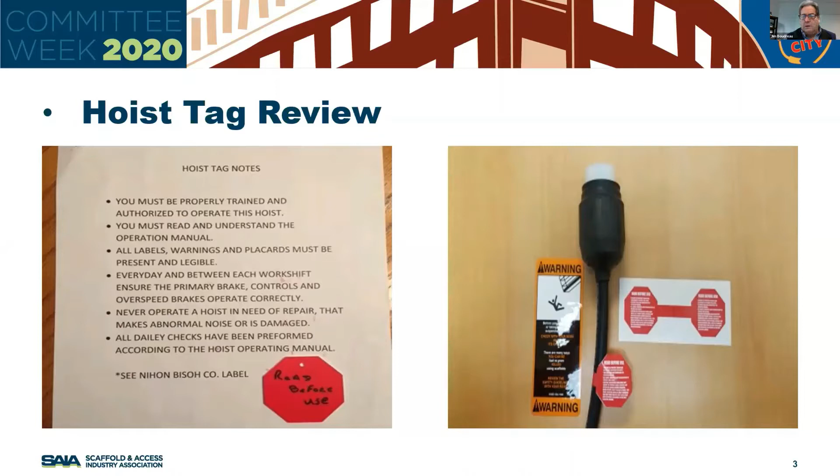Thank you. So ideally, the codes of safe practices for suspended scaffolds have been around as long as I can remember. The one we currently have is the longest and most comprehensive version, and we were wondering how many people really get to use it, and not only that, how many people can comprehend it. It's a concise document, everything you need to know about a swing stage in 3 pages, and essentially it's enough to put you to sleep. If you're competent you can maybe understand it. This idea was to try and put some pictures against it so that the end user who might not be able to comprehend the details of the codes for suspended adjustable scaffolds could go, and at least there'll be some pictures.

So that's the idea, no question on this slide.

And here we go, so these are the guidelines, I think, for suspended scaffolds. I think that's pretty straightforward to understand. I need to move you people out of the way. Okay, guidelines for the erection and dismantling of adjustable suspended scaffolds, but it's the codes. And here they are, just showing people what they are. I think this is the latest one up to date, and as I said, there's 3.5 pages if you haven't looked at them.

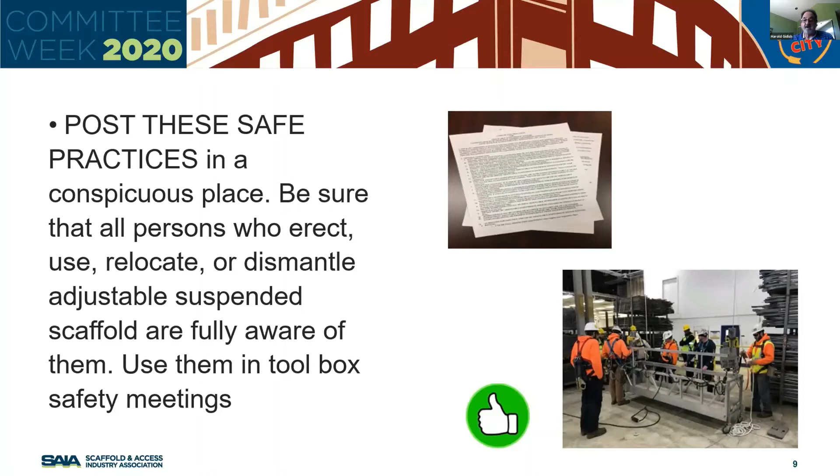There we go, so here's a picture, kind of depicts what people are doing regarding looking at the stage and getting ready to understand what it is they're looking at before they get to use it. Thumbs up sticker. Anybody got a better picture than that? I think it looks pretty good myself, but better pictures will be acceptable.

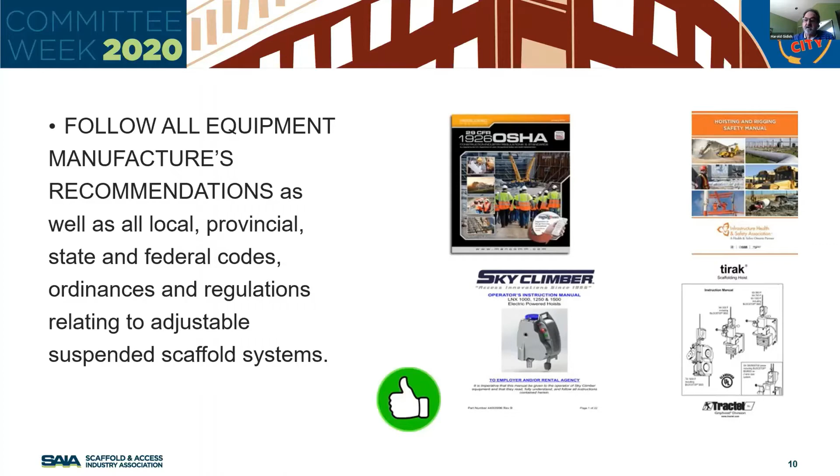The next slide, slide 10, if you're making any comments - it says follow all equipment manufacturers' recommendations as well as local, provincial, state, and federal codes, ordinances, and regulations relating to adjustable suspended scaffold systems. So got the OSHA sticker, got a manual sticker here, gives you the thumbs up. Anybody got comments, send those off to Jim. We've already got one comment, I've already noted it on the stickers. We'll respond to that at the end for the hoist tag sticker already.

All right, thank you. It says survey the site. A competent person shall survey the job site for hazards such as exposed electrical wires, obstructions, and unguarded roof edges or openings. Thumbs up picture. Everybody take a minute to maybe make some comments on this particular one.

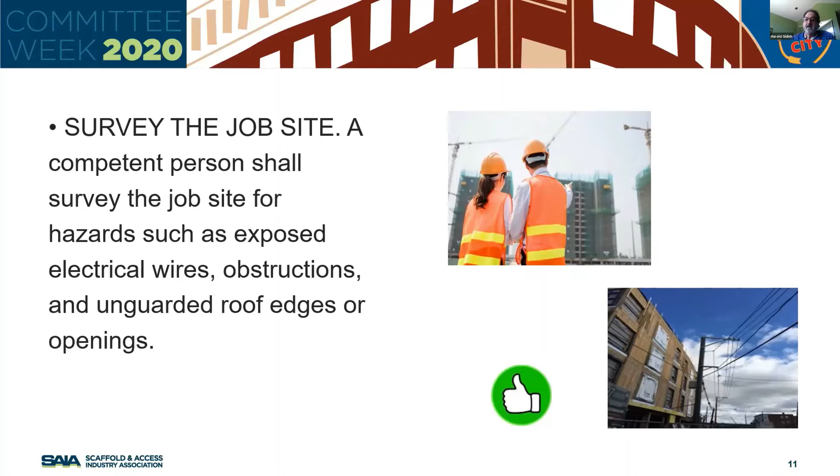All right, we'll get on to the next slide, 12. Inspect all equipment before each and every use. This is a close-up shot of a cracked weld. It says never use any equipment that is damaged or defective in any way. Mark it or tag it as damaged or defective and remove it from the job site. Got the thumbs down, don't do this practice.

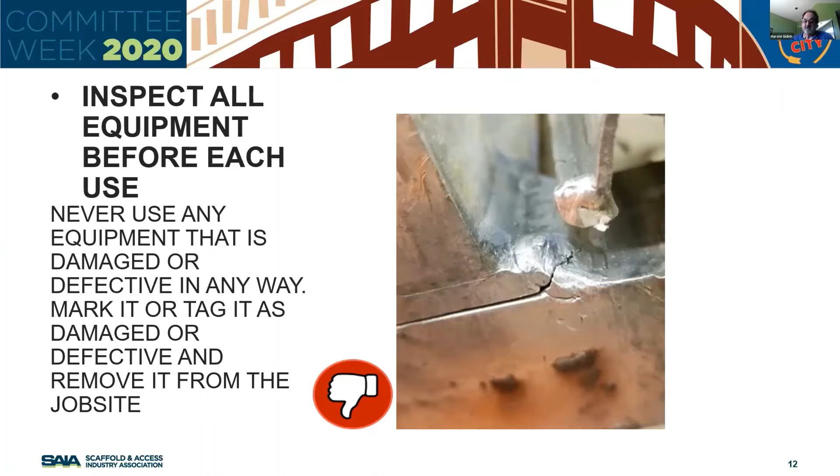We could also put the circle with the line through it showing don't do this, but does anybody have better pictures of that? It might take a minute to understand what that is, but it's definitely a cracked weld.

Next, this one is a copyrighted unit, so we do need a substitute. No, go back, Harold. Yeah, the cartoon one. Next one, that one? Slide 15, Harold. Oh, okay, right there. That's a copyrighted cartoon, so I do need one from someone. Anyone? And that one there in slide 17, I need to remove those pictures.

Okay, very good. So this is slide 15. It says, do not abuse or misuse, and it should say an adjustable suspended scaffold and adjustable suspended scaffold equipment. Never overload any equipment.

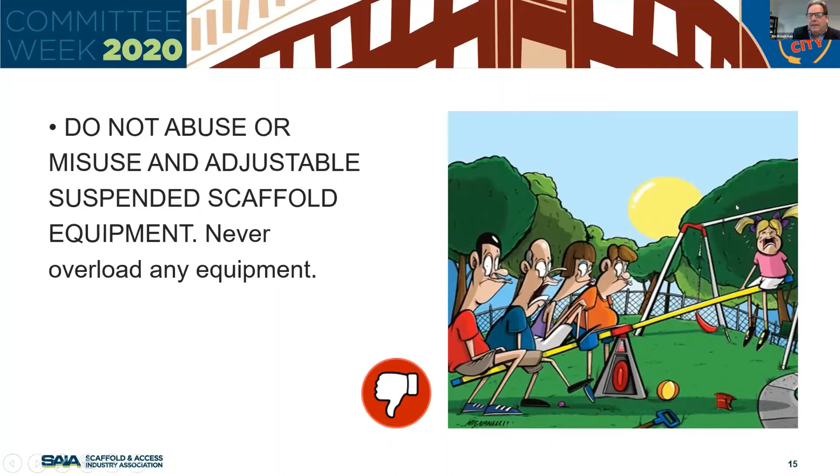Right, so we need to change that. It shows me, I thought it said a 4-to-1 safety factor. I like that, it did. So if we got one, there's a platform with a lot of steel on it or something like that. You guys see them, so if you can get them to us, that'd be great.

All right, the next slide says never take chances. This is slide 17. If in doubt regarding the safety or use of adjustable suspended scaffolds, consult a qualified person. Again, copyrighted, we need a new one.

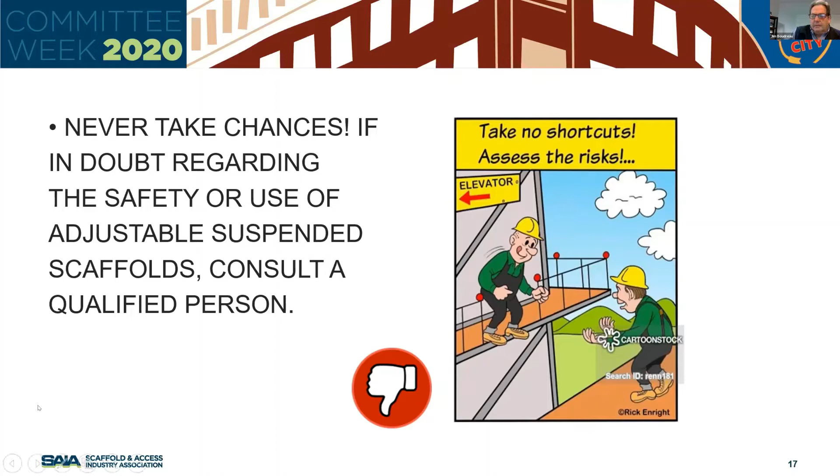And once again, anybody got a better picture? We'd like to get it. So that's slide 18 for comments.

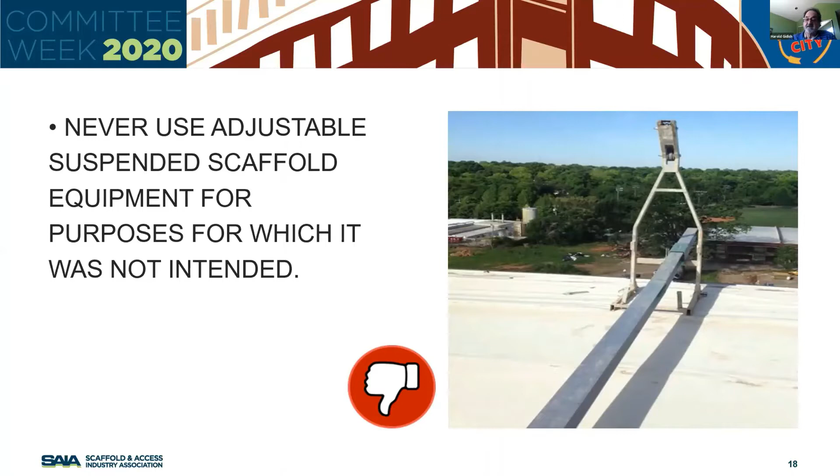Comments, that's slide 19. Not to be mixed up with COVID-19.

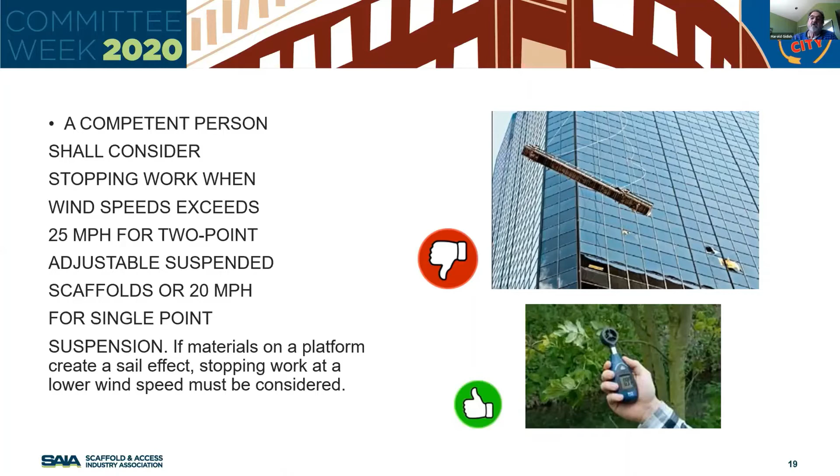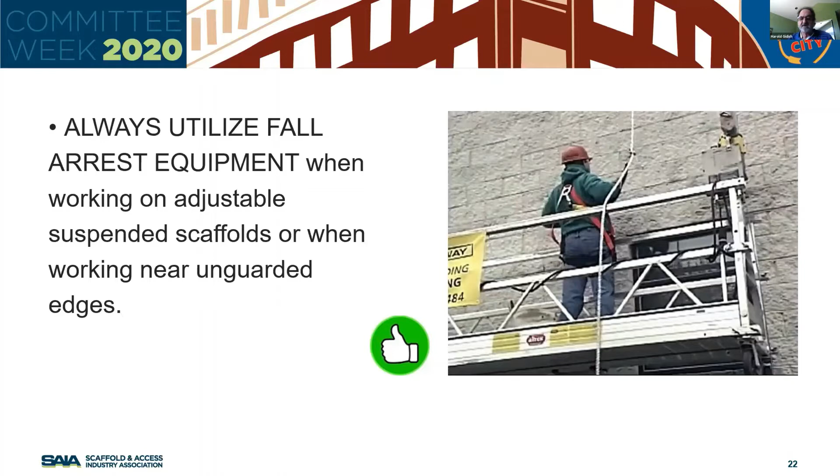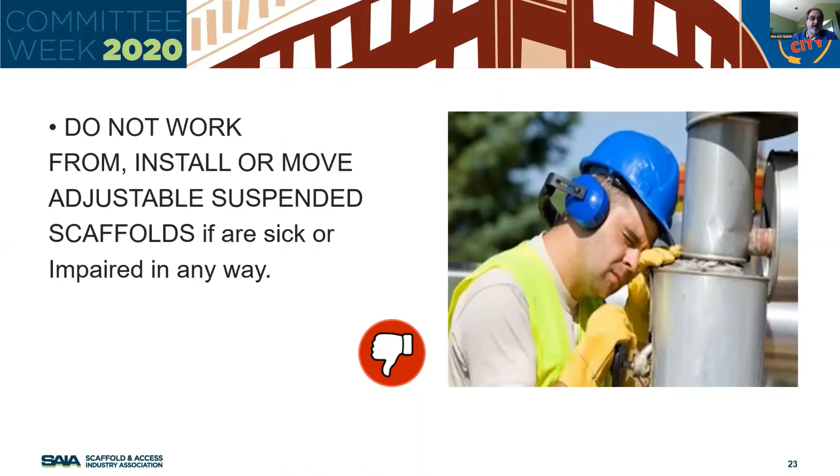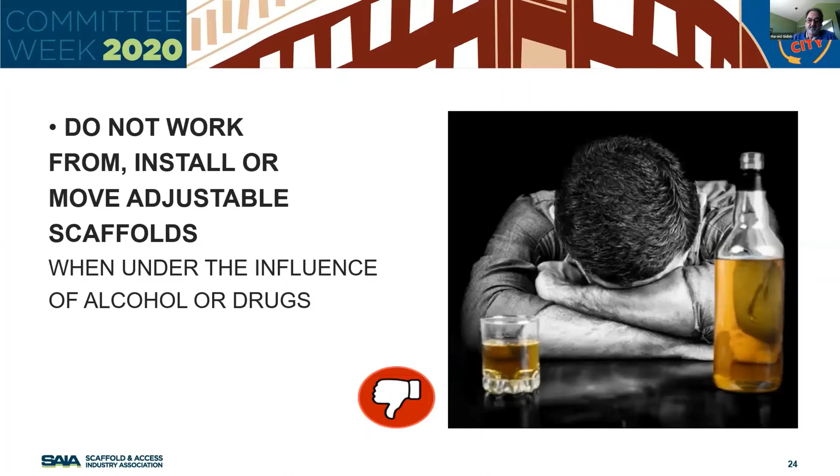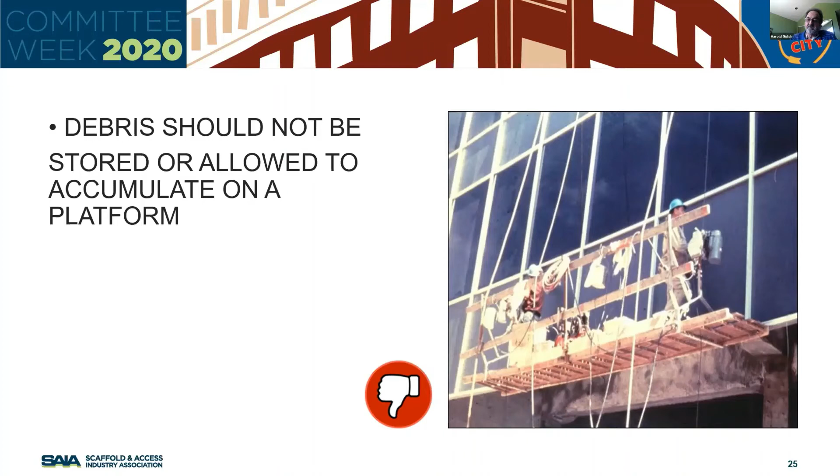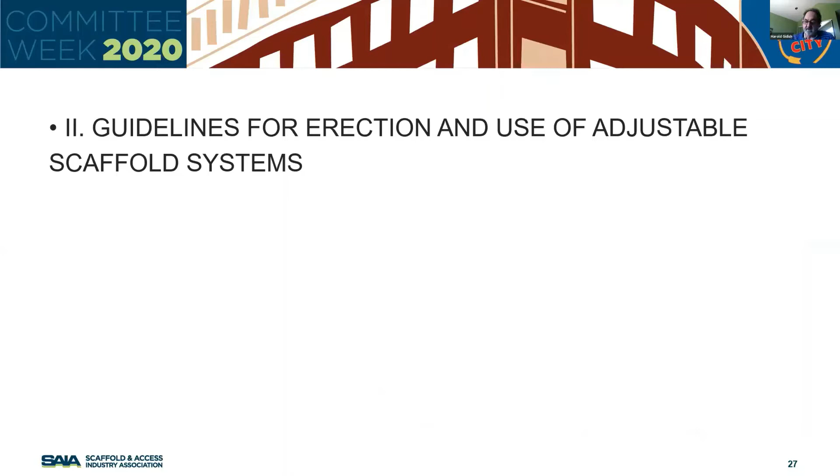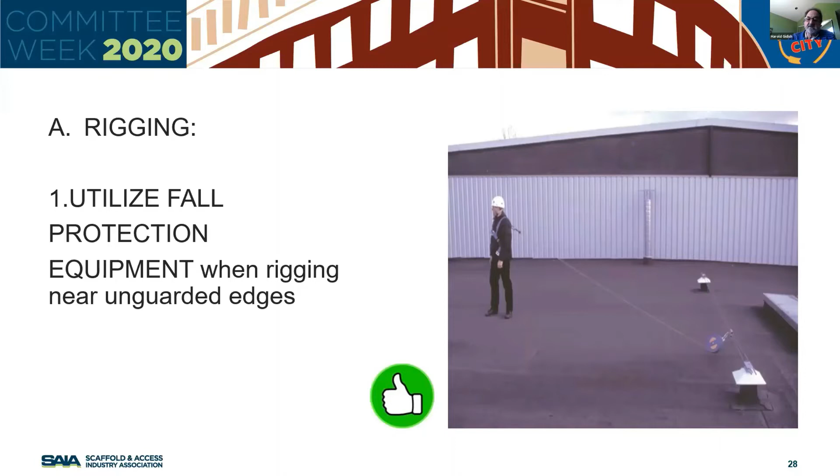The next slide is 27. It says guidelines for erection and use of adjustable scaffold systems. This is just a headline. And we get into A, rigging. Utilize fall protection equipment when rigging near unguarded edges. That actually lines up with one we said a little earlier. So if anybody has a better slide, we will be glad to entertain substituting it.

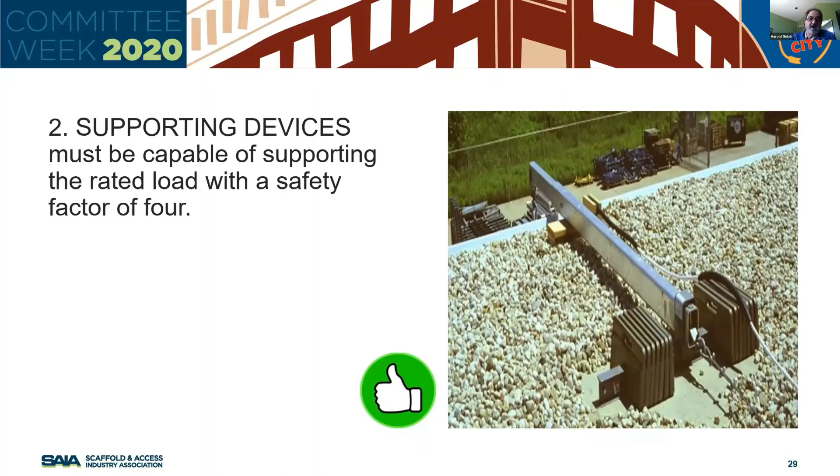That's 29, going on to number 30. All overhead rigging must be secured from unwanted movement in any direction. And that shows the tieback cable somewhat taut, with a thumbs up, so that's good.

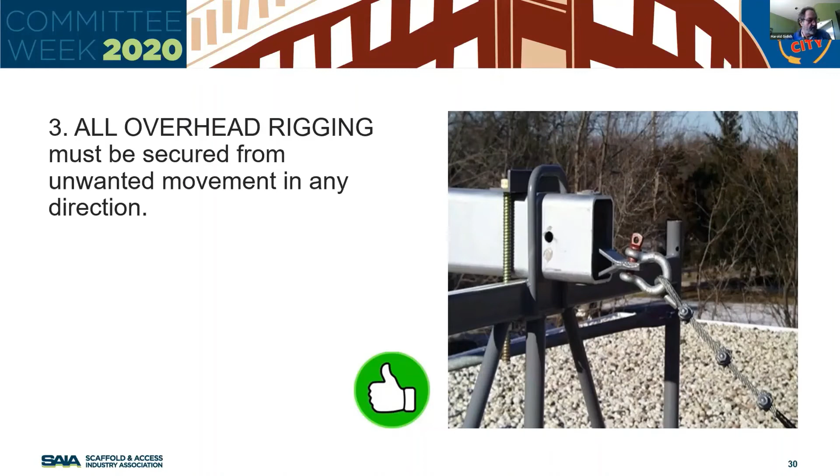I'm just going to lag in between each slide so that we can get the benefit of your comments. I believe Wendy commented once, and the sticker, like I said, we haven't checked it - it was done rather inexpensively. I would check for the weather. So those are the two comments we have so far. Check for the weather, okay? So apart from comments, we are looking for better slides, and that's primary for this.

Counterweights, this is slide 31. Counterweights used with outrigger beams must be of non-flowable material and must be secured to the beam to prevent accidental displacement. So there's a stop bolt on there. Shows the thumbs up on the left and the thumbs down on the right.

All right, moving on to number 32. Outrigger beams that do not use counterweights must be installed and secured to the roof structure with bolts or other direct connections. Direct connections shall be evaluated by a competent person. I have a note on that, Jim, just to come back to this slide and talk about it, just you and I, 32. Okay, I got it. Thank you.

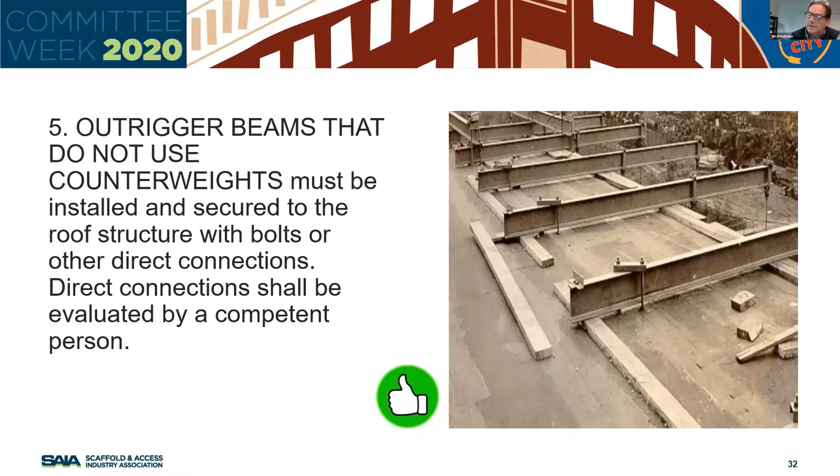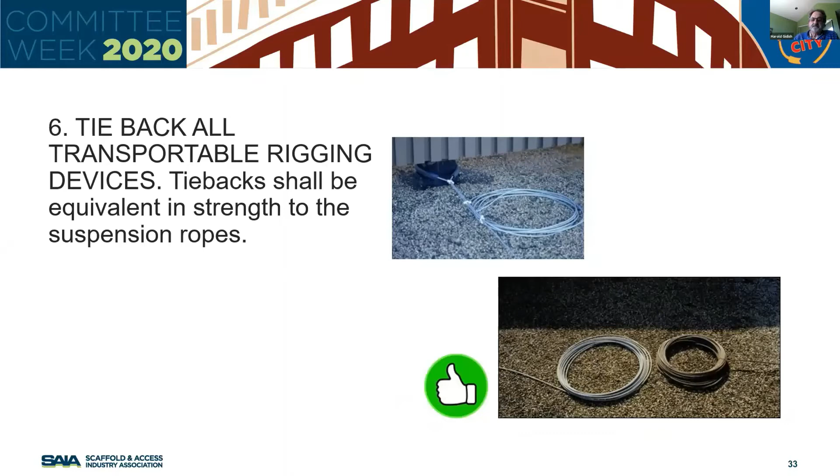Slide 33 says tieback all transportable rigging devices. Tieback shall be equivalent in strength to the suspension rope. Okay, it shows it taut.

Slide 34 says install tiebacks at right angles to the face of the building and secure them without slack to a suitable anchor capable of supporting the hoist rated load with a safety factor of 4. That's slide 34, so that is straight back.

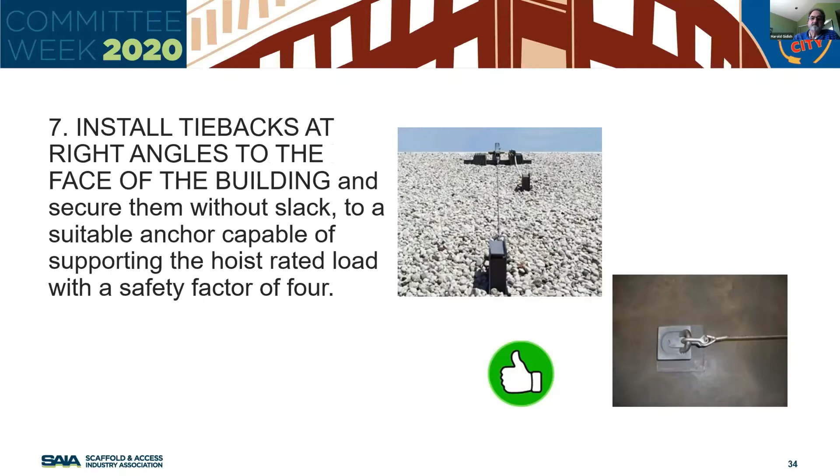Slide number 35. In the event that tiebacks cannot be installed at right angles, two tiebacks at opposing angles must be used to prevent movement. What can we do to improve this installation is the question we put up there.

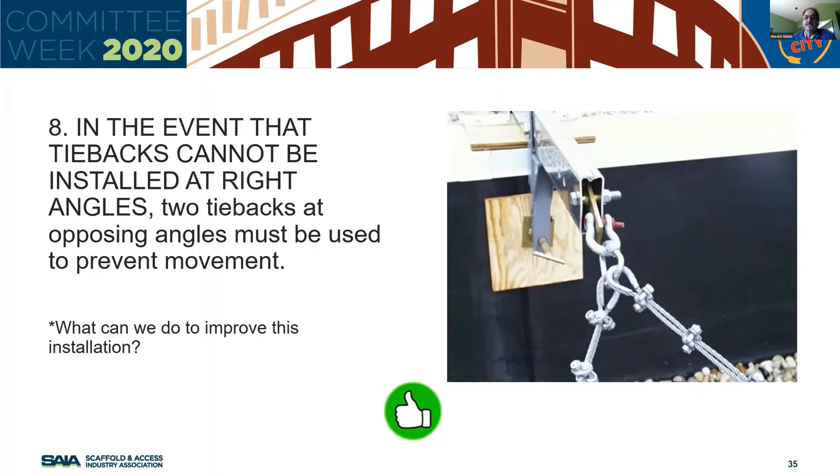Slide number 36. Rig and use hoisting machines directly under their suspension points to prevent movement or side loading. All right, shows everything plumb. That's slide 36.

Slide 37 is the heading, wire rope and hardware section. Slide number 38 basically says use only wire rope and attachments specified by the hoisting manufacturer.

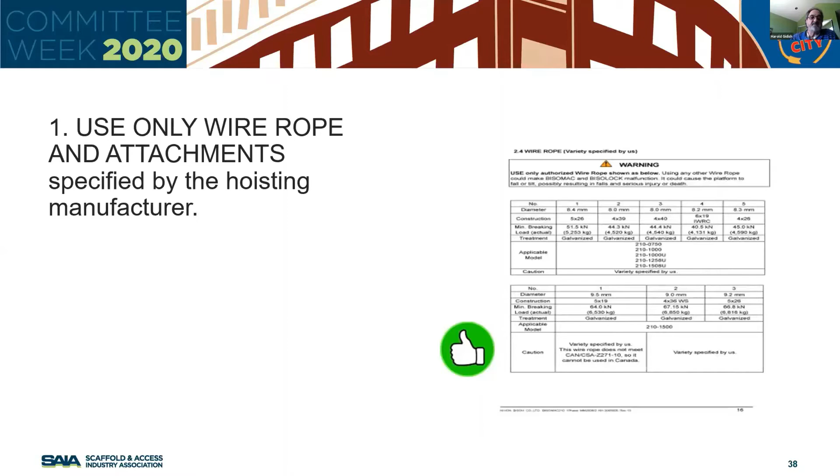Thank you. All right, use only wire ropes and attachments specified. We've done this one, slide 38, going on to slide 39. Handle wire rope with care. Always use gloves. All right, that looks like somebody's in a workshop working on the rope.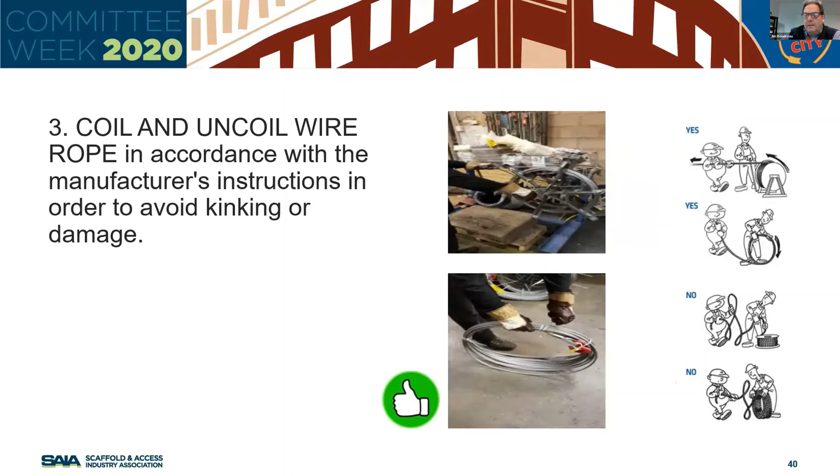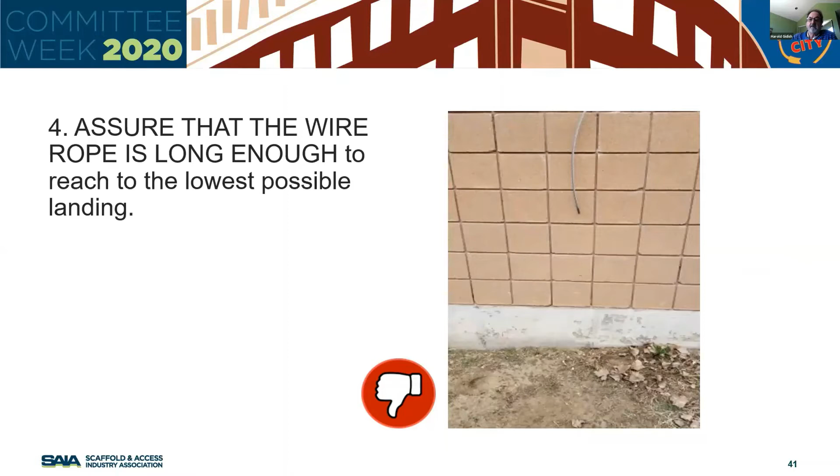On slide 41, ensure that the wire rope is long enough to reach the lowest possible landing. Slide 41.

All right, slide 43. It's a pretty nice, busy slide, but I think it says a lot. Inspect wire rope in accordance with the manufacturer's instructions. Do not use wire rope that is kinked, bird-caged, corroded, undersized, or damaged in any way. Do not expose wire rope to fire, undue heat, corrosive atmosphere, electricity, chemicals, or damage. I don't know how we expose wire rope to damage, but okay. That's slide 43. I think that's pretty good.

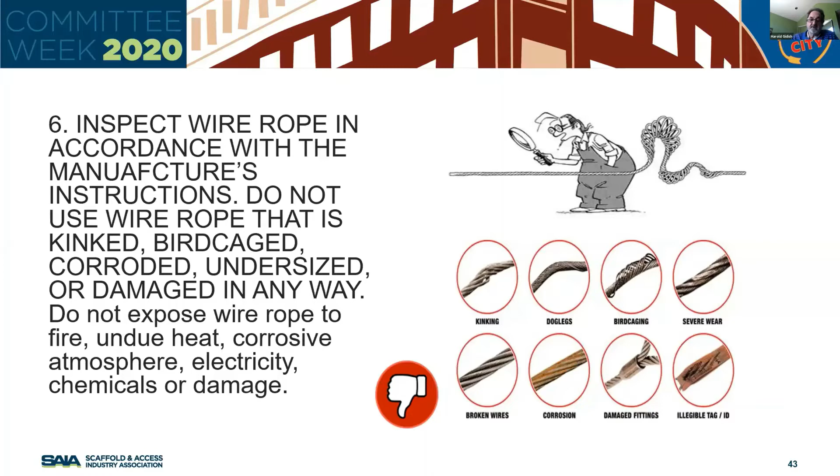Moving on to slide 44. Wire ropes used with traction hoist must have prepared ends. Follow the hoist manufacturer's recommendations.

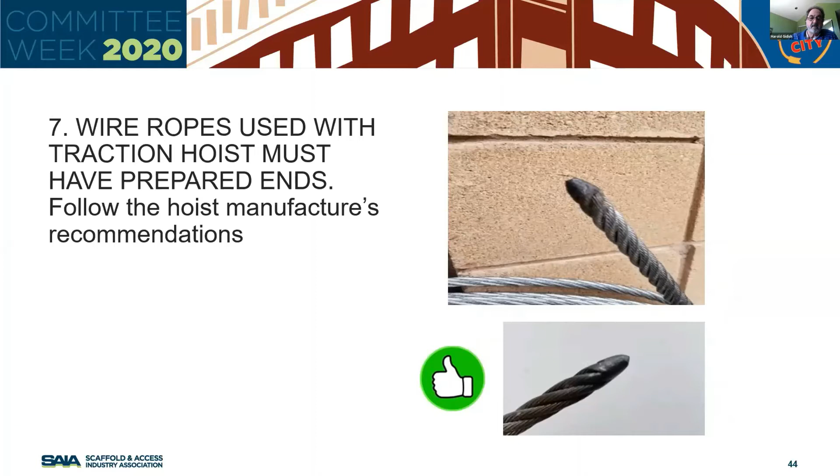Slide 45. Use thimbles at all wire rope terminations.

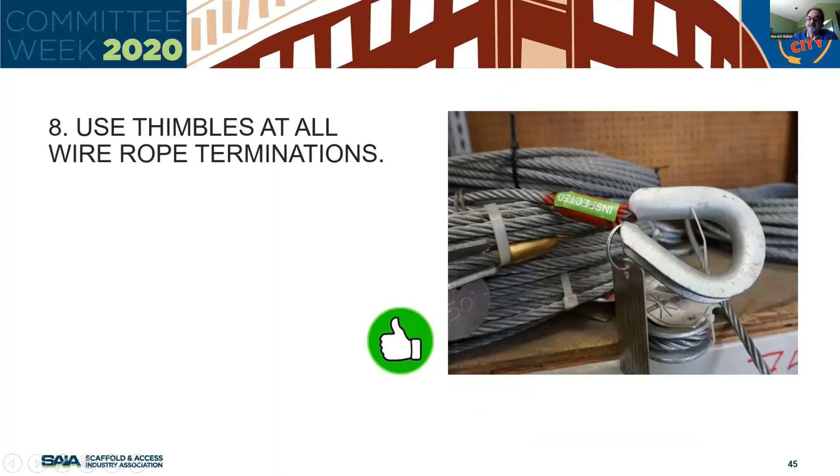Next slide is slide 46. Use J-bolts, wire rope clamps, or swedges or swedged fittings. Do not use U-bolt clamps.

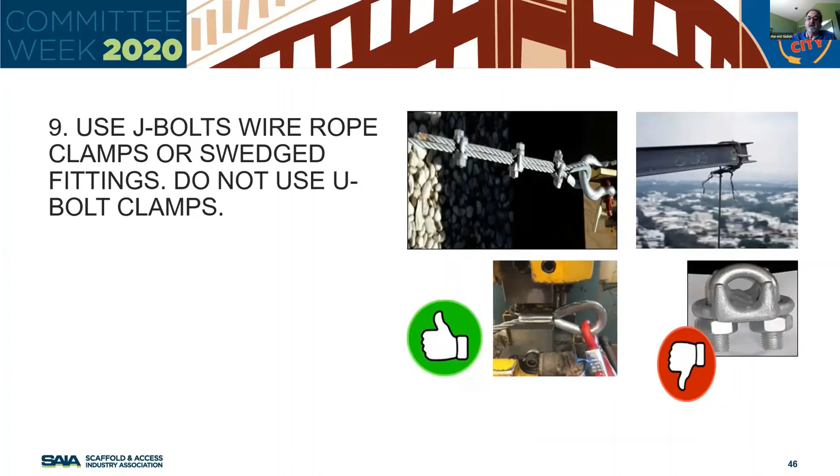Now the title slide, power supply for equipment. Slide 49. Use properly grounded electrical power cords. Protect them with circuit breakers. Slide 49.

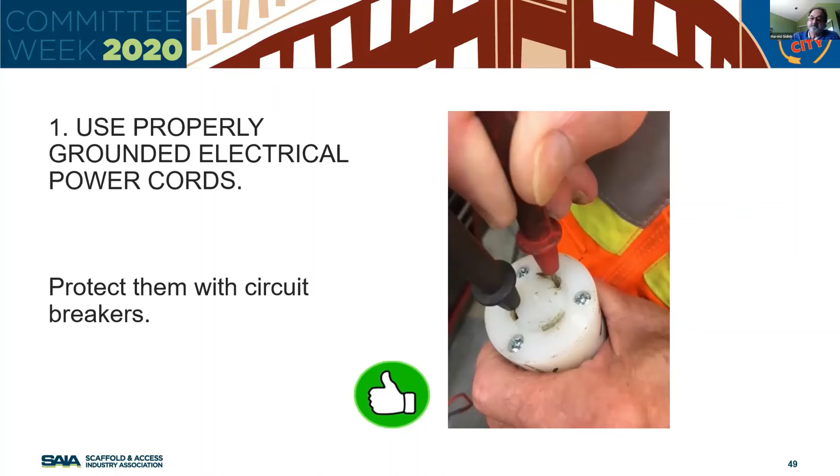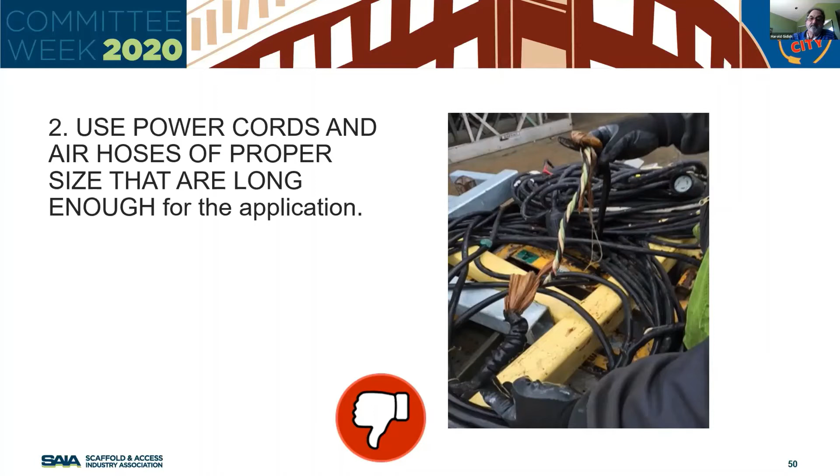All right, moving on to slide 51. Power cord and air hose connections must be restrained to prevent separation. So we might encourage trying to get one with an air hose with the safety clips. Slide 51.

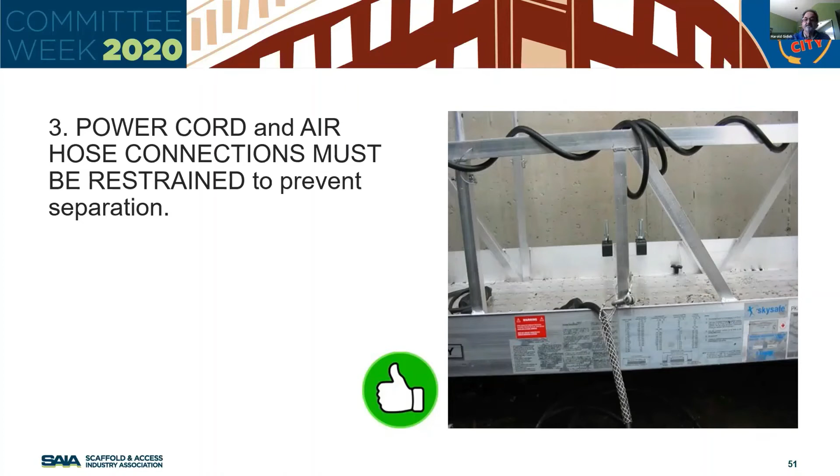Slide 52, use strain relief devices to attach power cords and air supply hoses to the platform to prevent them from separation. So that's pretty much the same as the one before, but a different device.

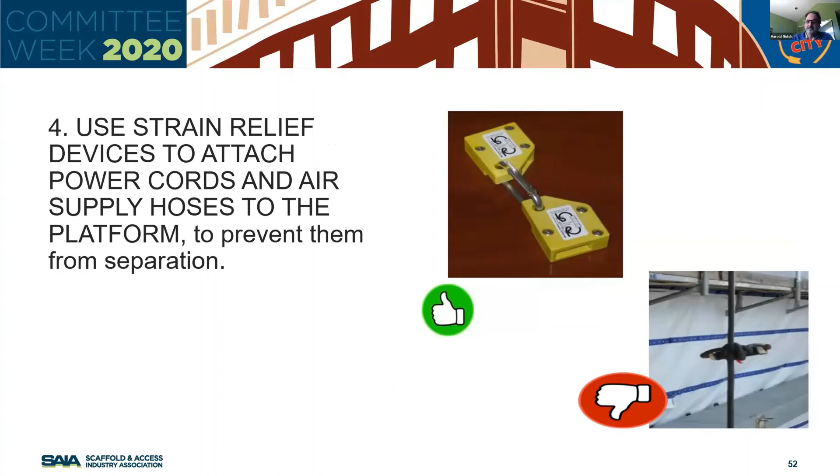All right, slide 54. Use ground fault circuit interrupter, GFCI, with power tools. That one says it all, I think.

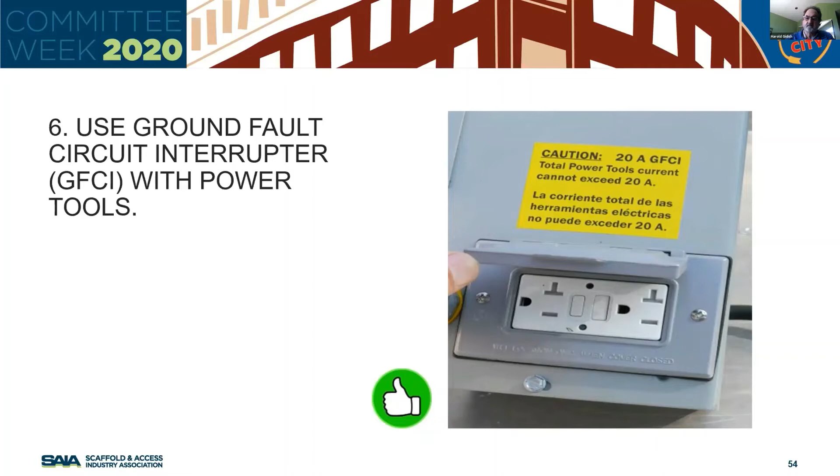All right, next slide is another heading, fall arrest equipment. Slide 56. Each person on an adjustable suspended scaffold must be attached to an independent fall arrest system. I think this is a slight overkill.

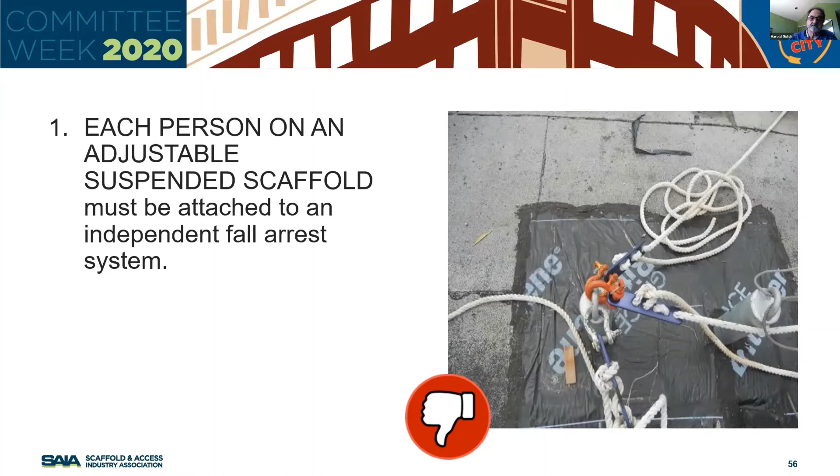Slide 56. Slide 57, each vertical lifeline shall be attached in accordance with the manufacturer's instructions to a separate anchorage capable of supporting a minimum of 5,000 pounds, 2,267 kilograms, or an anchorage designed by a qualified person.

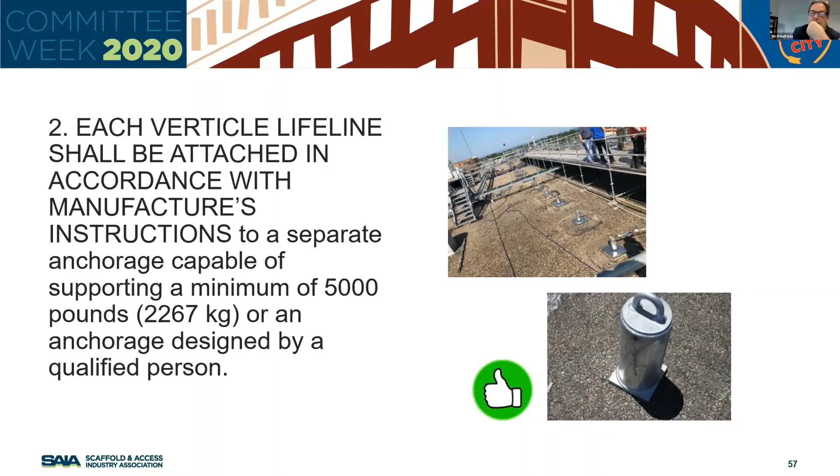Slide 57. Moving on to slide 58. Do not wrap lifelines around structural members unless lifelines are protected and a suitable anchorage connection is used.

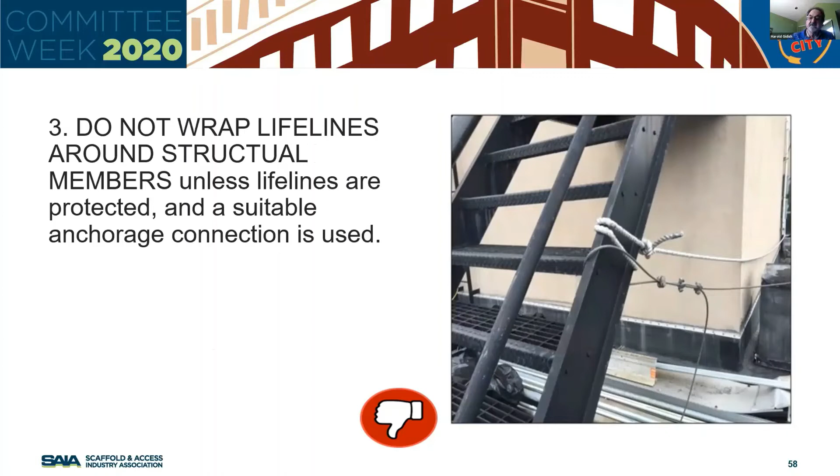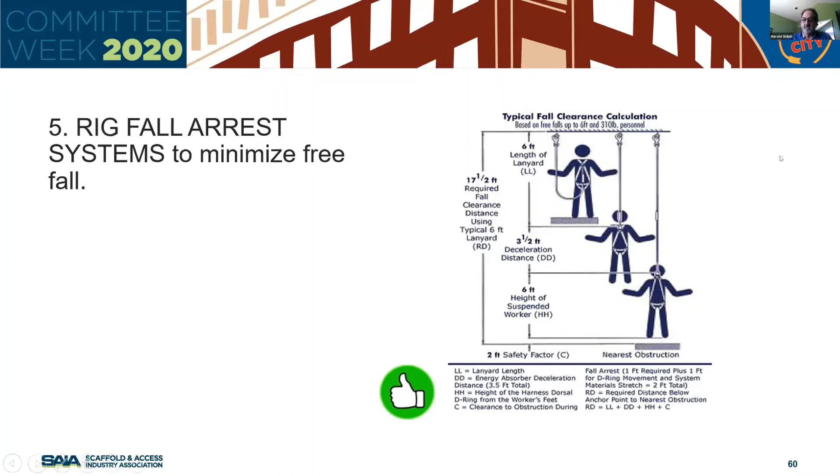All right, slide 61: install vertical lifelines so they hang freely.

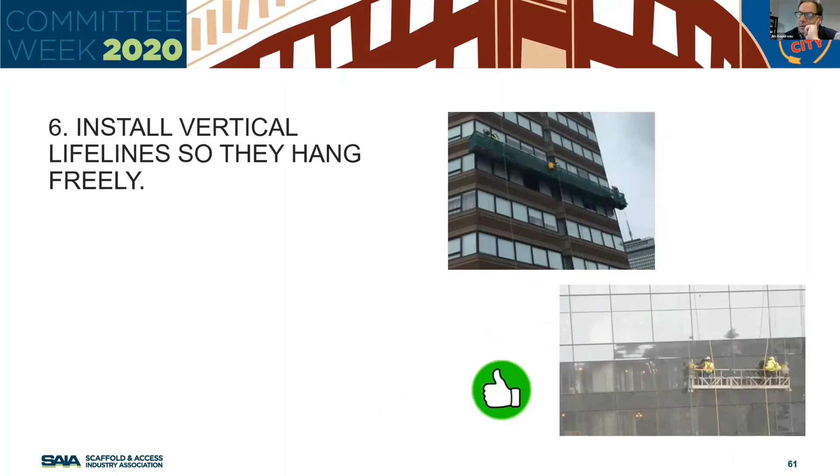Number 62: use lifelines that are compatible with the rope grab.

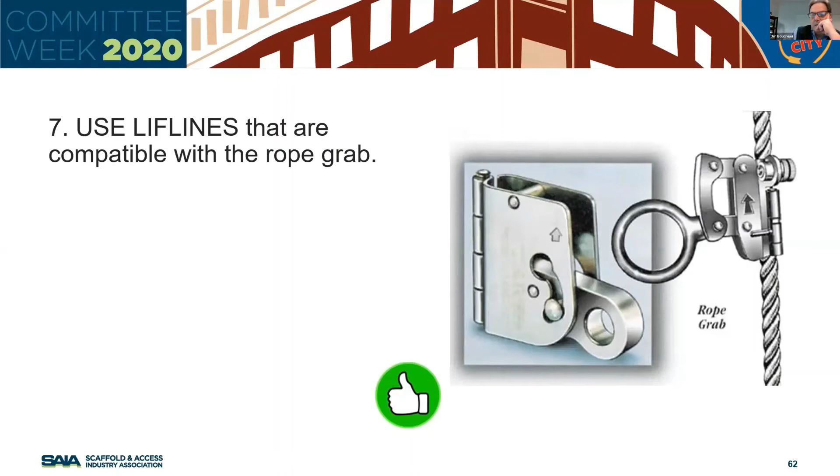Slide 63: install rope grabs in accordance with the manufacturer's recommendations.

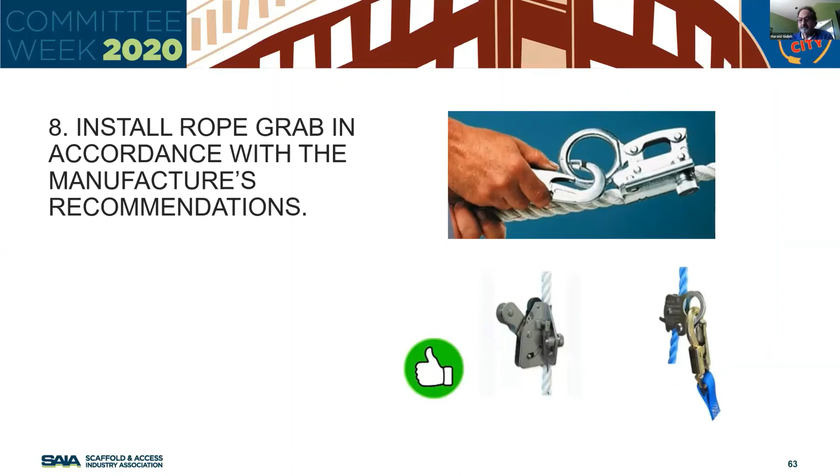Slide 64: keep rope grab positioned above your head.

Slide 65: utilize full body harness of proper size and fit.

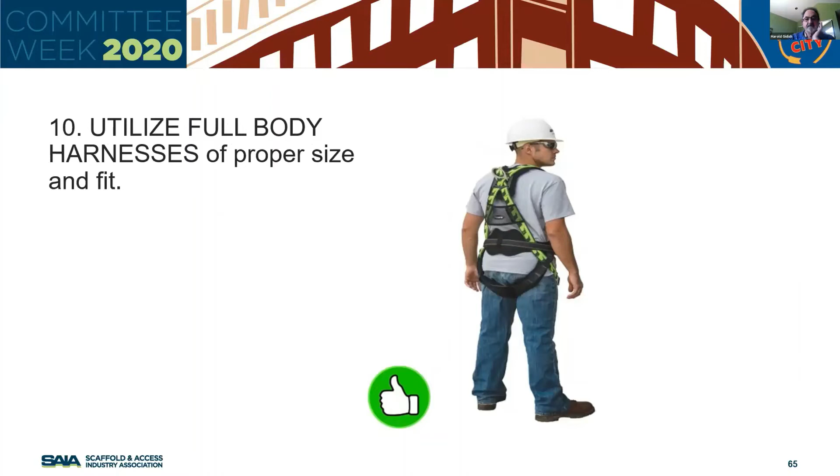Slide 66: utilize shock absorbing lanyards attached to the D-ring at the center of the back between the shoulder blades.

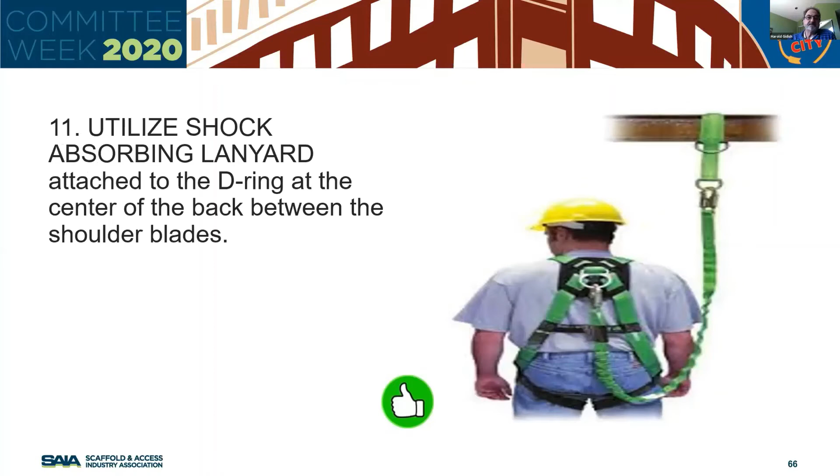Slide 67: inspect fall protection anchorage and equipment before each use. Consult the fall protection supplier for inspection procedures.

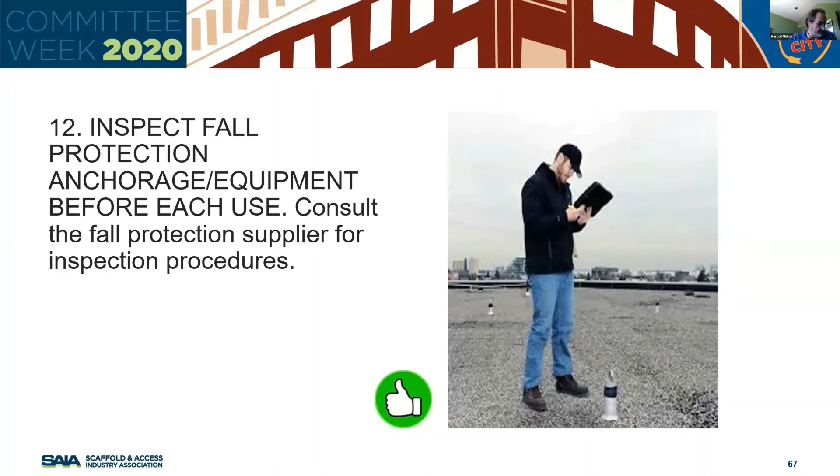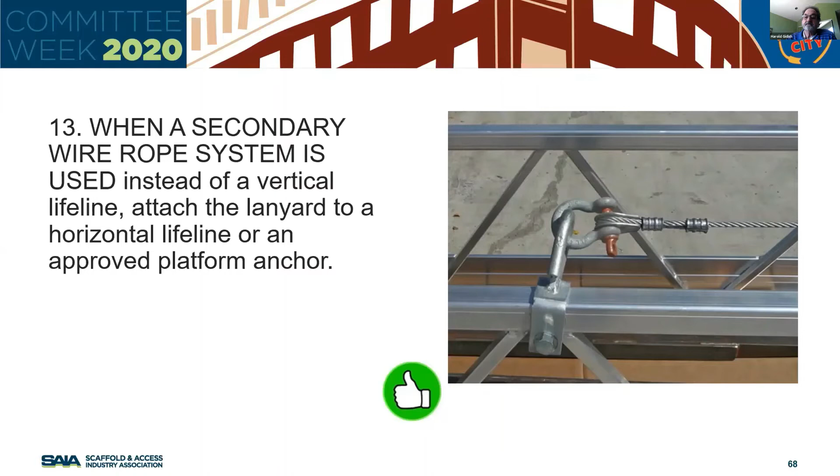Slide 68: when a secondary wire rope system is used instead of a vertical lifeline, attach the lanyard to a horizontal lifeline or an approved platform anchor.

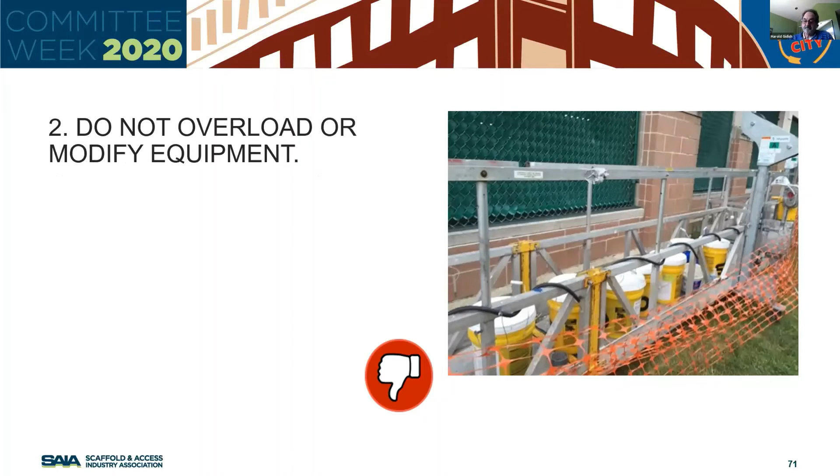Thumbs down. Slide 71: do not overload or modify equipment.

Slide 72: inspect all equipment, including hoists, platform, and rigging before each use.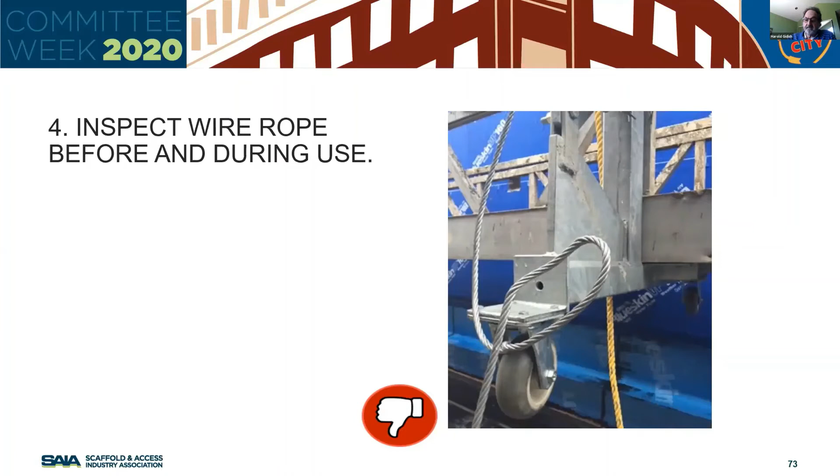Slide 74: use care to prevent damage to equipment. So what happened in this picture: the boom lift you see up above had its knuckle break, and it dropped a load of sheetrock they were loading in the window. Luckily there was nobody on that swing stage at the time. Oh my gosh.

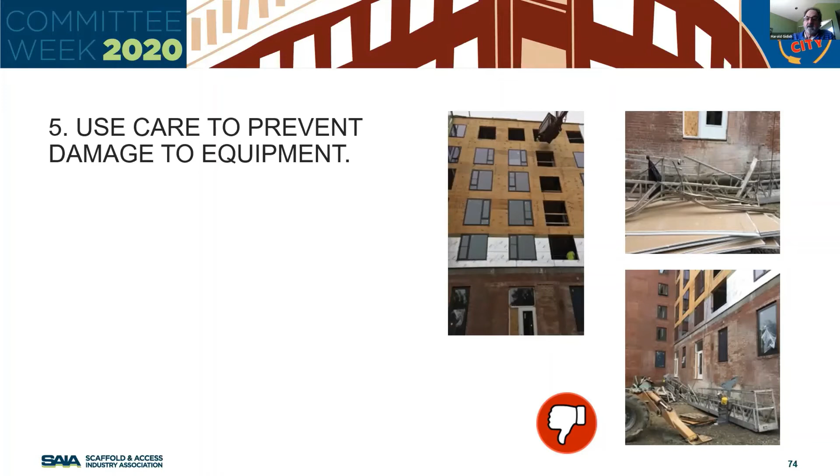Slide 76: always maintain at least 4 wraps of wire rope on drum type hoists.

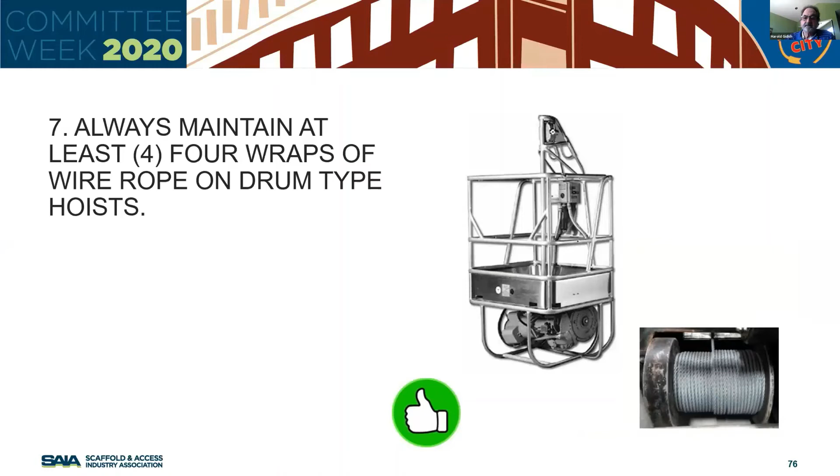Number 77: do not connect platforms unless the installation is designed for that purpose.

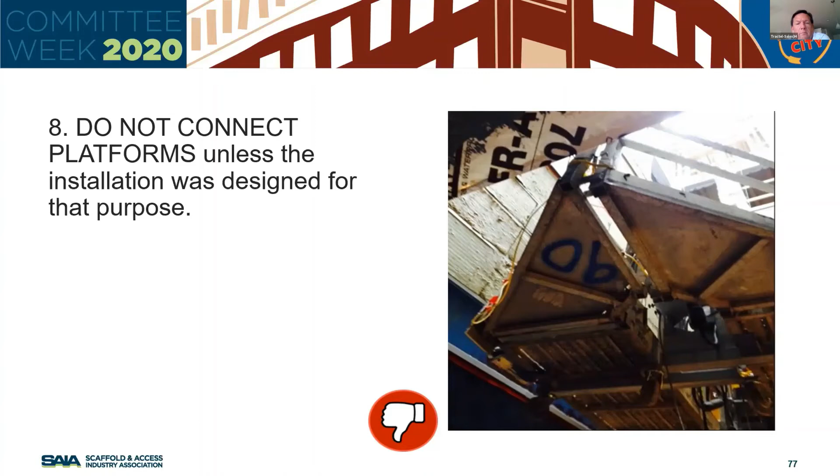All right, slide 78: do not move adjustable suspended scaffolds horizontally unless safe work practices are followed.

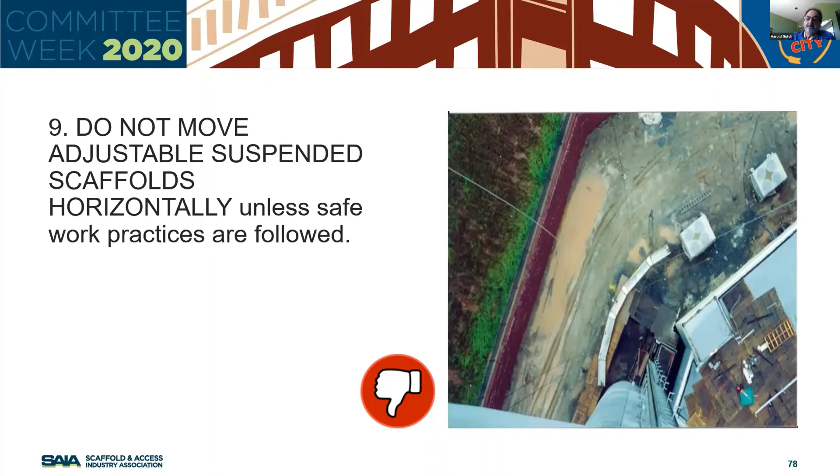Moving on to slide 79: when rigging for another drop, assure sufficient wire rope is available before moving the suspended platform horizontally to the next location.

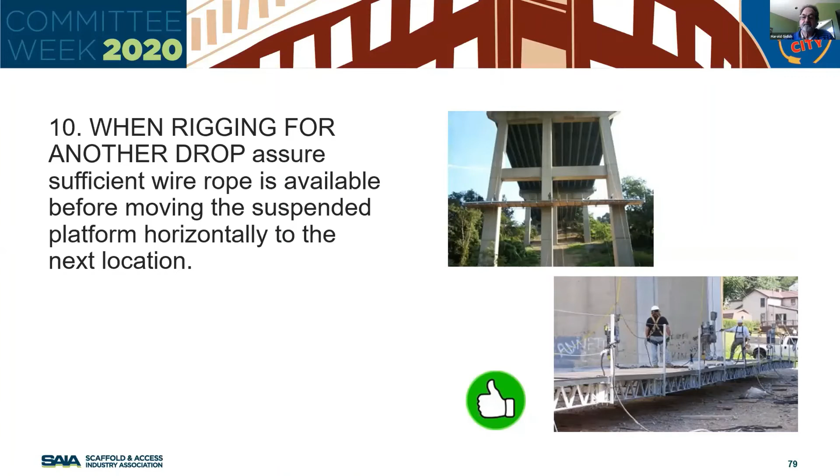Moving on to slide 82: insulate wire rope above and below the platform. That's a nice B submittal.

This whole section came from the SAIA magazine article that B-Access provided several years ago. It's one of the best articles I've ever read. So B was very accommodating, he gave us a lot of these pictures for this.

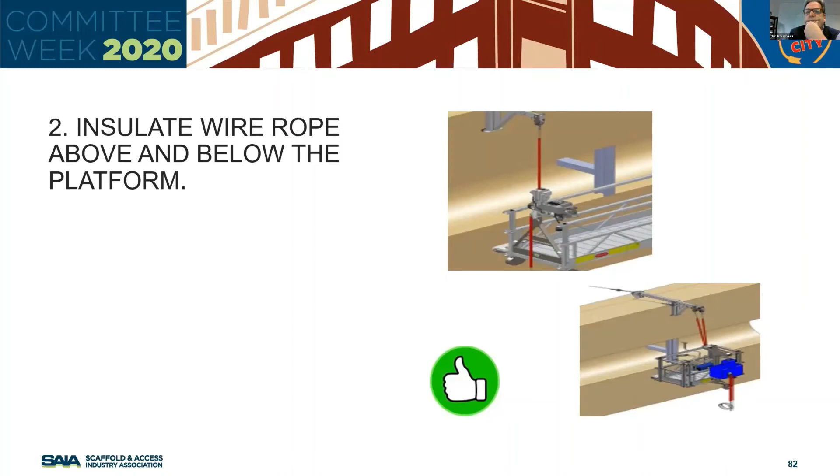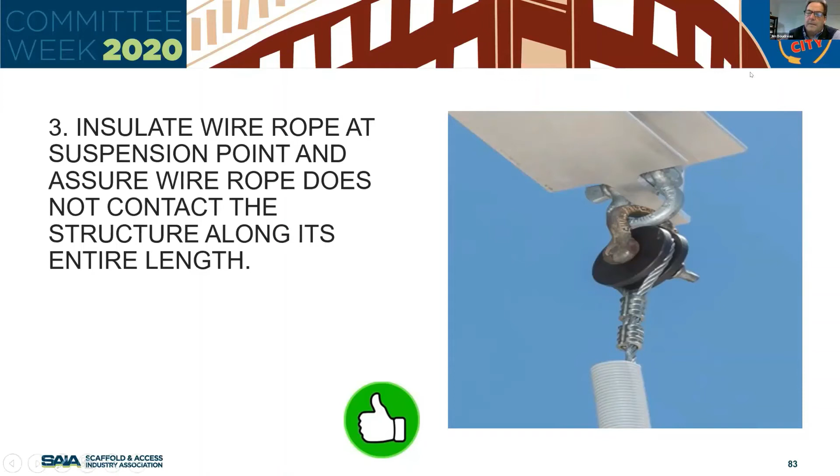Slide 83... Slide 84: prevent the wire rope from becoming grounded.

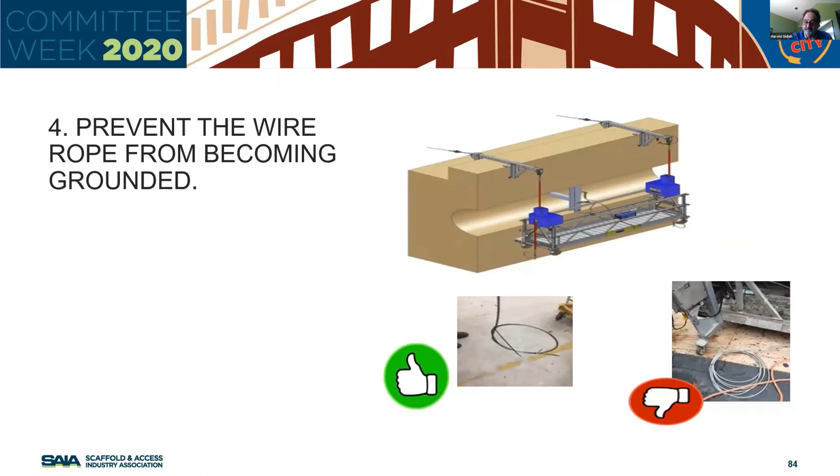Slide 85: insulate each hoist with a protective cover.

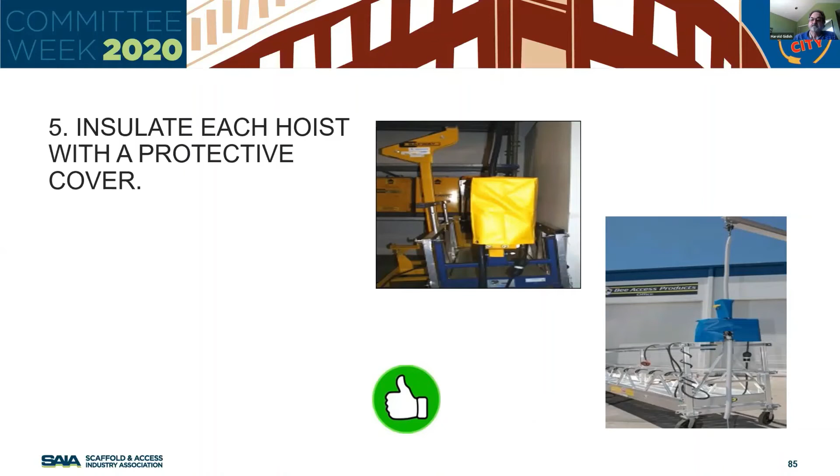Number 87: since field conditions vary and are beyond the control of the SSFI and the SAIA, safe and proper use of adjustable scaffolding is the sole responsibility of the user.

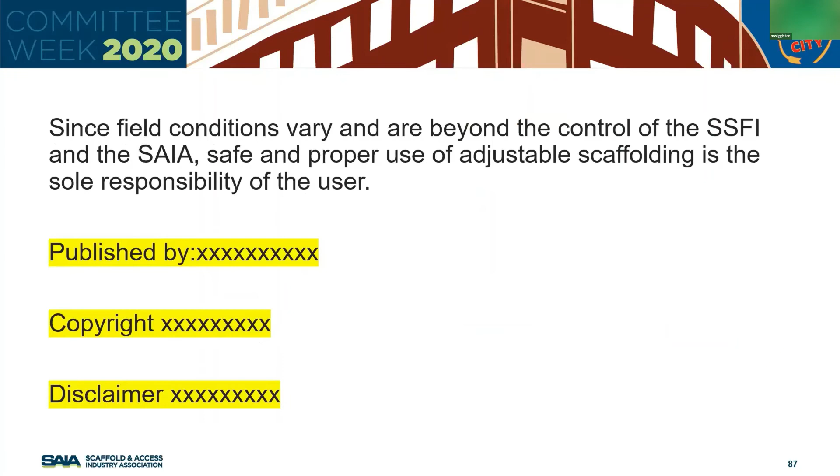Oh, you're going the wrong way, buddy. Yep. All right, okay, those are the questions, that's where we are.

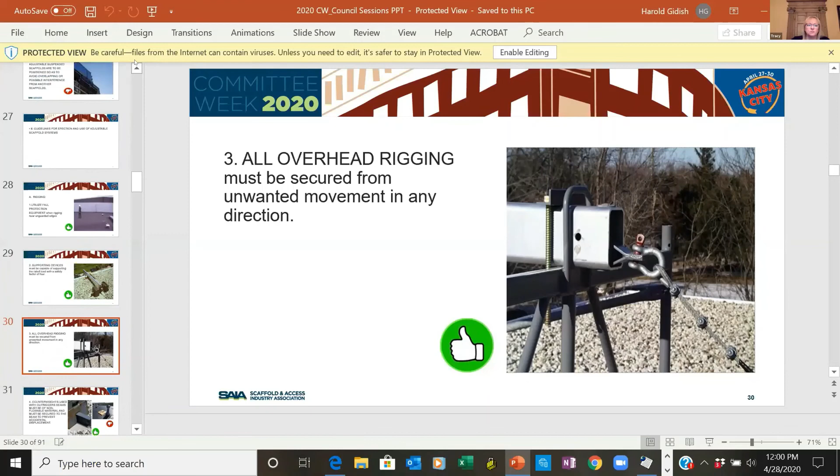Okay, mine was on slide 19. I was trying to wait to the end, but I didn't know we should probably try to do it when we were on slide 19. You say to measure the wind speed. I just wanted to say, should we tell them to measure this wind speed at the top of the building? Because the wind speed could vary a lot compared to the top and bottom of that building.

So this is the Codes of Safe Practices, we can do whatever we want on this. If there are comments, as long as we don't get the slides too wordy, because we're trying to get away from the words to the pictures, we'll take any of those comments into advisement. Okay, that was my only comment.

Tom DeJong is next. Yeah, hi guys. Jim, I have more pictures for you that I can submit. Where can we get the draft, access to the draft of this?

I can send this to you, Tom, as long as it stays internal, that's fine. Correct me if I'm wrong, Jackie, I can send this and we can open it up to other people to work on it, correct? Yeah, that's part of your committee. So sure, if you want to get some council members together and work on this together, there's nothing wrong with that. We just don't want a draft floating out there in the public until it's done and reviewed.

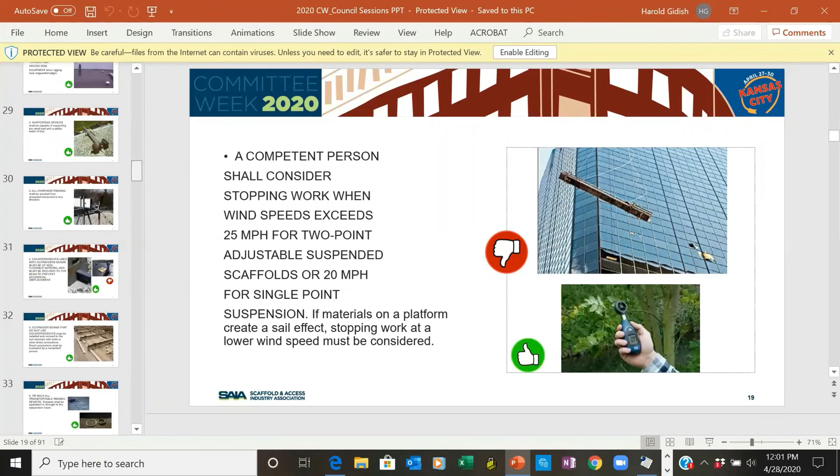Okay, just want to be sure. And lastly, have we thought about September? Are we doing convention as normal? Are we making adjustments, or how do we cope with this new situation? Are we going to have a live convention where everybody sits six feet apart, or have we thought about that?

Tom, we are having some internal discussions about that. Right now, we're just going to move along business as usual, and we'll definitely keep everyone posted as more unfolds. But right now, we are planning on having the convention in September. Registration is open. We are going to send out a formal announcement on Monday, but if you would like to wait to register as we get further down the road, we fully understand that as well.

Anybody else? No? So generally, do you still like the idea? Does the idea follow a format that you think is worth continuing to develop? You can see we're pretty close at this point. Okay, overall consensus is yes.

Okay, great. So, by the way, Tom DeYoung, you're not visible. Does anybody else see Tom? Because I show him as his camera's off. You're on an iPad too, by the way. But I don't see you. Yes, that's correct. Yeah, I thought I was on live. You're maybe talking, but we don't see you.